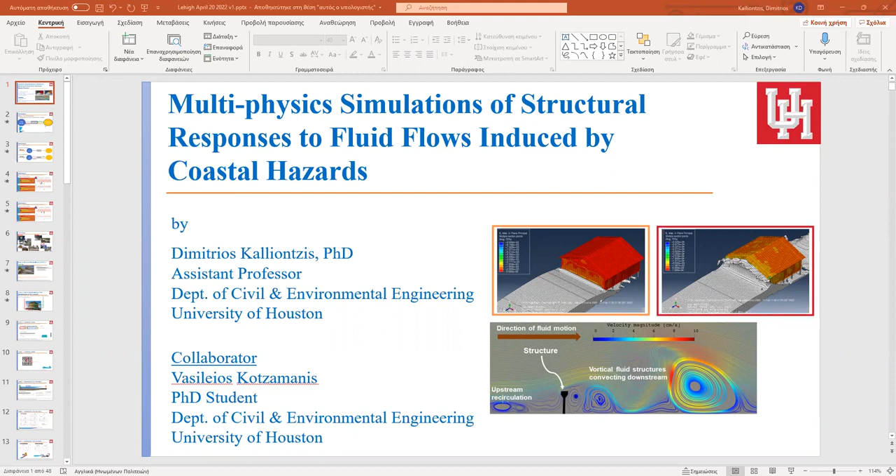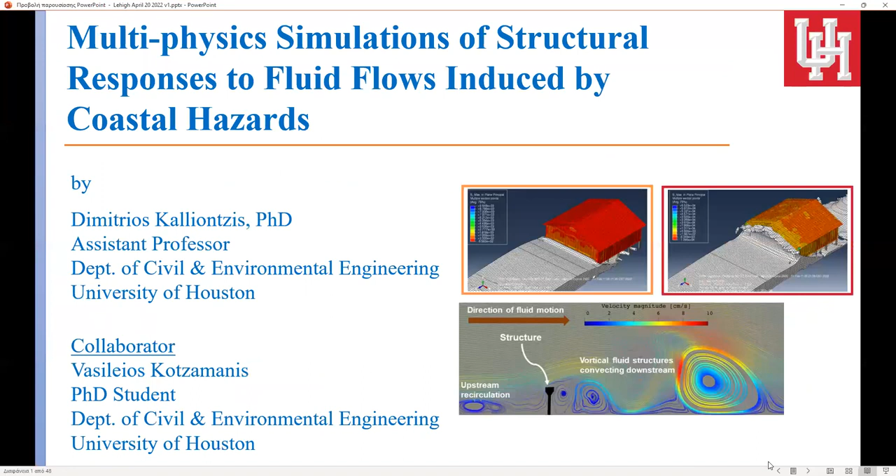So in the first— Dimitrios, sorry, yes. Can I interrupt you a minute? Because we only see the first slide, your title slide. Are you still on that title slide? Oh really? No, no, I'm sorry to interrupt. Maybe if you go into presentation mode, that may work better. Yeah, thank you, sorry for interrupting. Oh okay, I thought— sorry, I'd give it a little bit. Yeah, I just didn't know to make sure. Okay thanks, yeah, thanks Jim, I didn't pick up on that. I thought the presentation was moving forward because to me it was, but how about now? Is it better? You're good now. Okay, background slide is now, and then. Okay, great, yeah, I was going through that. I thought that that was on.

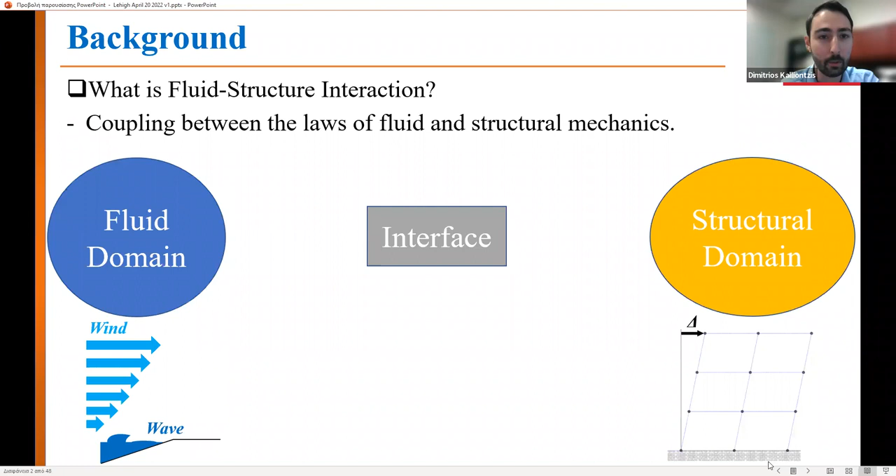So basically, let me go through a little bit back to my discussion so that everyone follows what I'm talking about. I try to go through a definition of fluid structure interaction. In fluid structure interaction, you have the fluid domain, and you have the interface between the structure and the fluid, and then you have the structural domain. Usually in a fluid structure interaction, you have the fluid forces transferred to the interface, and then from the interface back to the structure, and then you also have the structure deformations going back to the interface and affecting the behavior of the fluid domain.

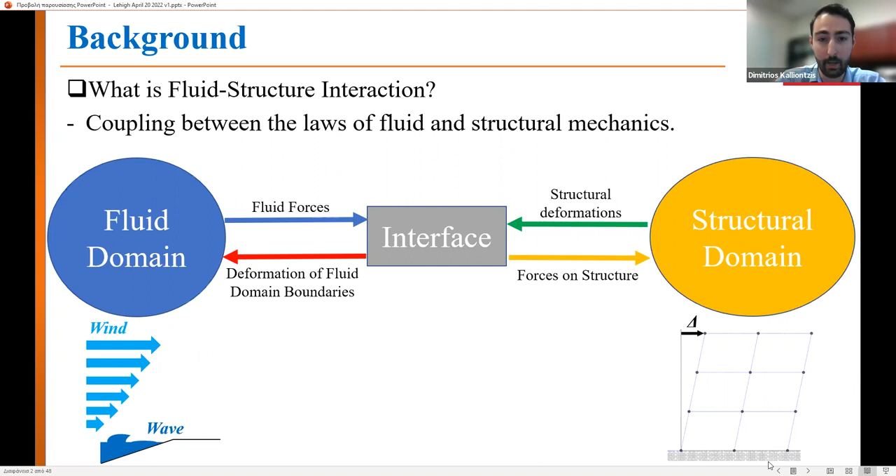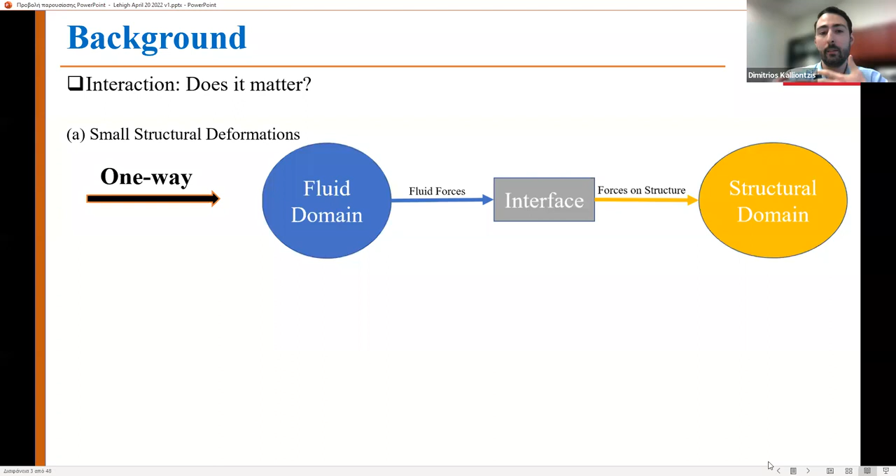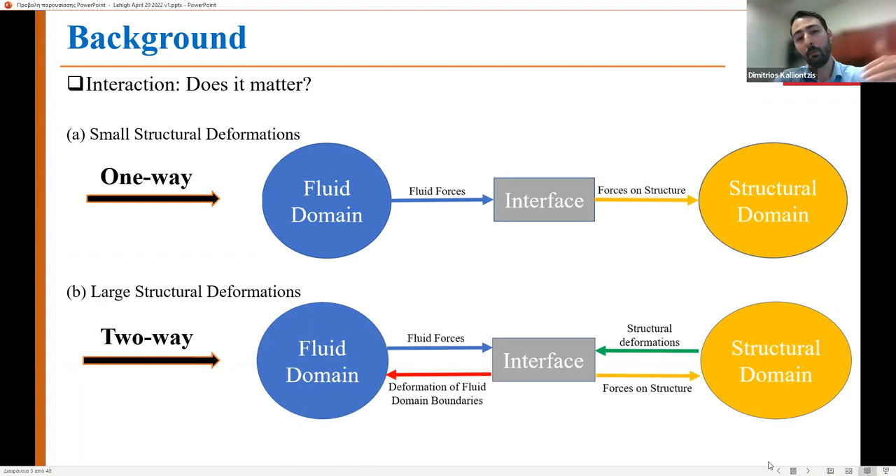So then what I talked about is, you can have two types of interactions. Either you have one-way interaction, usually the case where we have very small structural deformations that may not be affecting the behavior of the fluid domain. Then you have another type of interaction, two-way, where you have large structural deformations where you do need to transfer the knowledge generated from the structural behavior back to the fluid domain. So that kind of separates the two, one-way and two-way.

And here I show one example trying to address this question of why the interaction really matters, and should we actually transfer the information back to the fluid.

And then I have another example where I compare this very small deformations case to where we have large level structural deformations. In the first case, where you have the small displacements, the frequencies of the oscillations are different. In the large displacement case, the frequency of the oscillations is affected by this loop of information going from the fluid to the structure and back to the fluid.

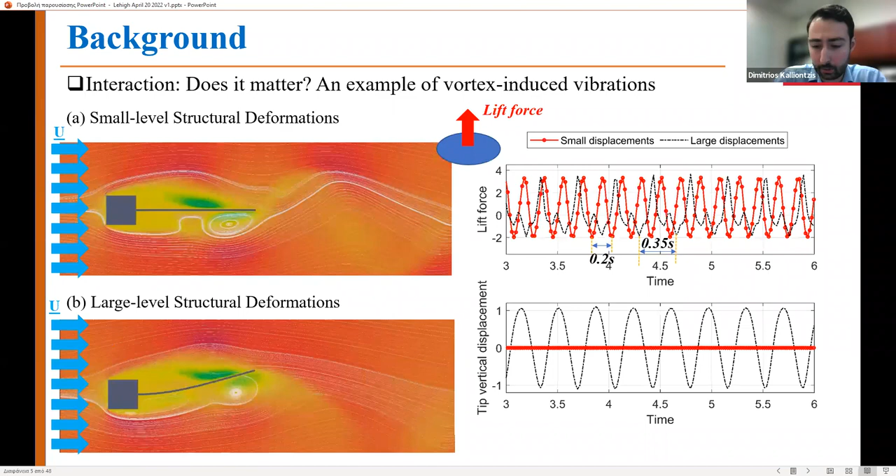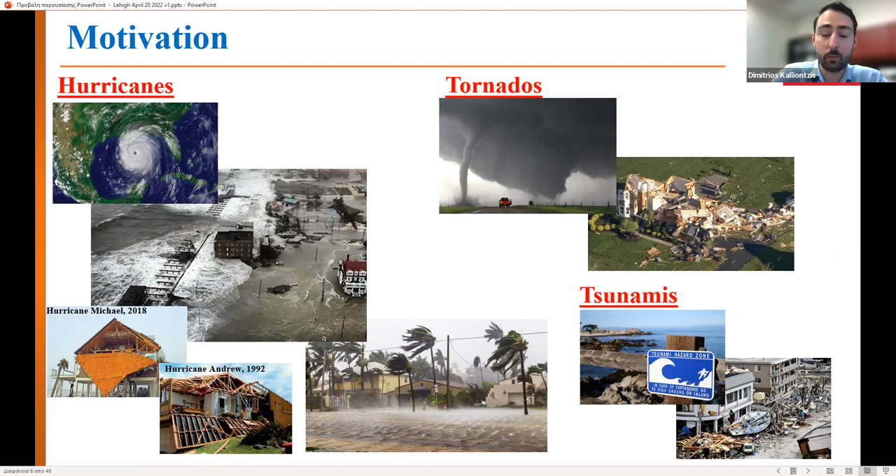So there are many cases in nature where we may need to pay attention to this two-way type of FSI behavior. And why do we care about this in civil infrastructure is because we have many types of problems related to fluid loads applied to structures, which can be due to wind or due to wave loading.

The first study that we tried to approach here at the University of Houston related to elevated coastal housing. Why elevated is because in many cases when you have a coastal house near the shoreline, you do have waves, you do have surge, and by elevating the house, you kind of reduce or even completely avoid the wave loading to the housing.

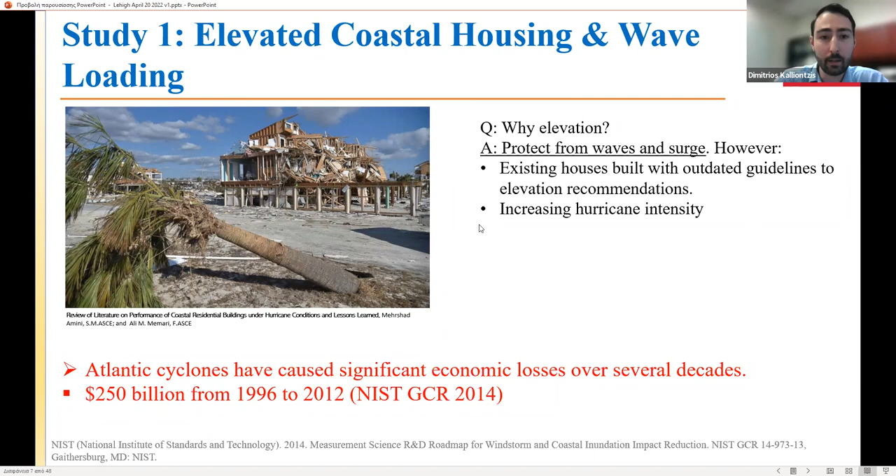However, there is a motivation still about looking into the wave loading affecting the houses, mainly because some of those houses were built with outdated guidelines related to elevation, and also there is the issue of increasing hurricane intensity, that maybe in the future we will have to encounter larger waves.

So in this type of problem, we try to look into two sources of flexibility for the structural system. One relates to the effect of the timber-to-timber connection for light frame elevated coastal houses. And then we also looked at the SSI, or the effect of the foundation flexibility.

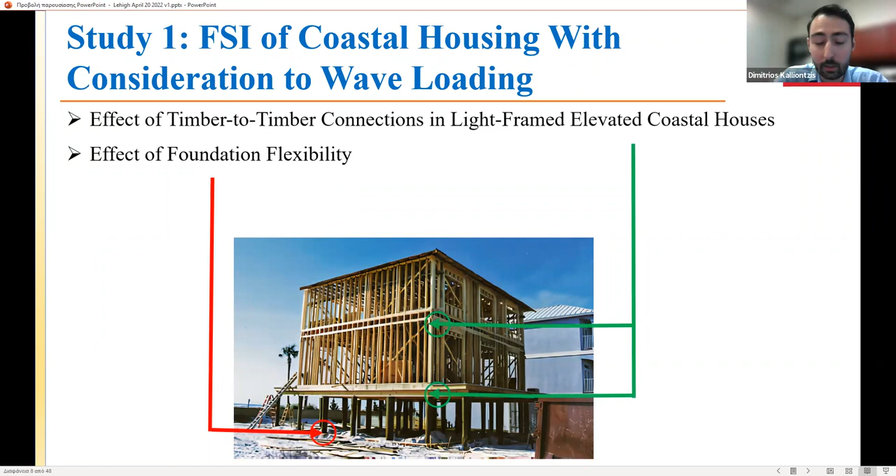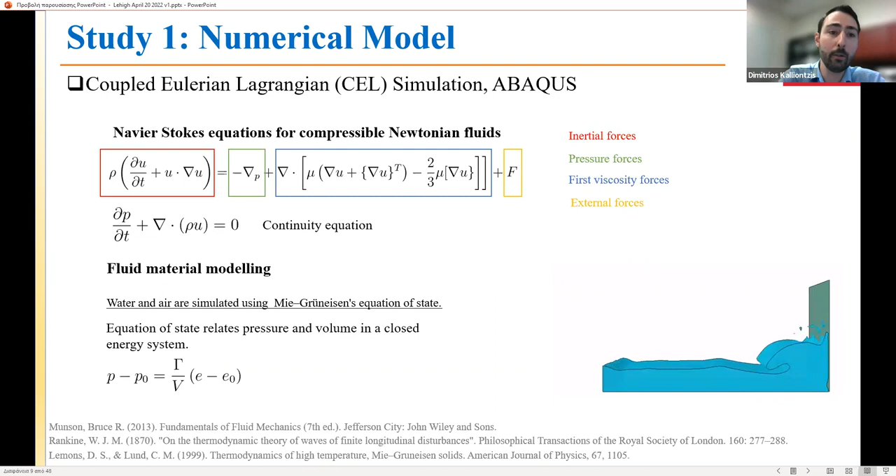So for this study, we tried to use an existing framework for simulation. It's in Abaqus, called a coupled Eulerian-Lagrangian simulation. In fact, this is what is called an immersed boundary method that is being used in Abaqus.

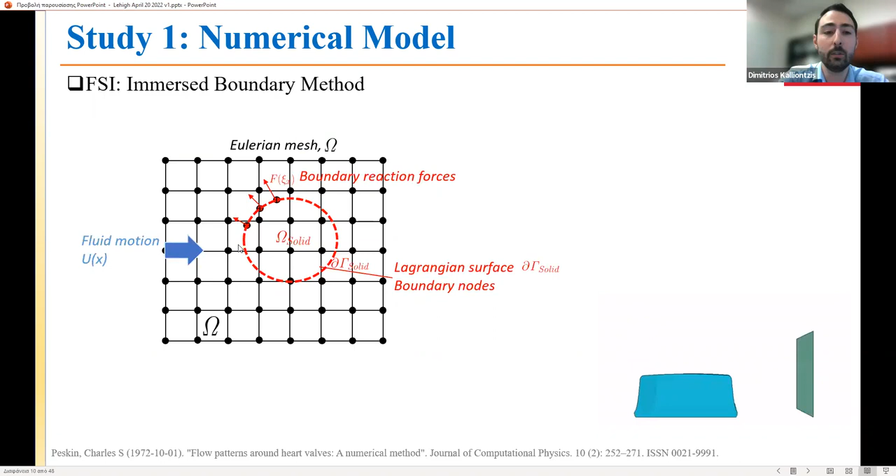The nice thing about this method is that you build your Eulerian mesh and then you immerse the structure into this domain. It's also named in the literature as what is called an interface capturing approach, where you only have to use some kind of interpolation function to establish the interface between the structure and the fluid.

So before we embarked on actually solving the problem that we're after, we tried to use some of the existing data to compare with the capabilities of this method in Abaqus, and how well it can capture experimental data. So we looked at a problem that was solved.

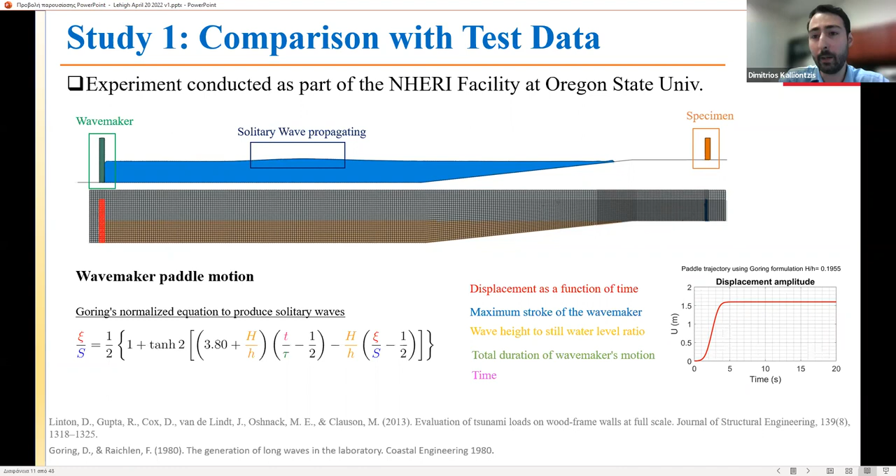I think it was an experiment at Oregon State, where there was a wave maker producing a solitary wave, and there was a relatively rigid specimen on the other end that would experience the wave and measure the pressures on the specimen.

So in the first comparison, we compared the wave profiles generated in Abaqus and in the experimental setup. Overall, I think the wave profile was captured pretty well. There was only one case where we were not able to capture the wave, just before the crashing of the wave, and this could have been because of some nonlinearity at the discontinuity of the surface of the coast, and this is an issue we're still investigating.

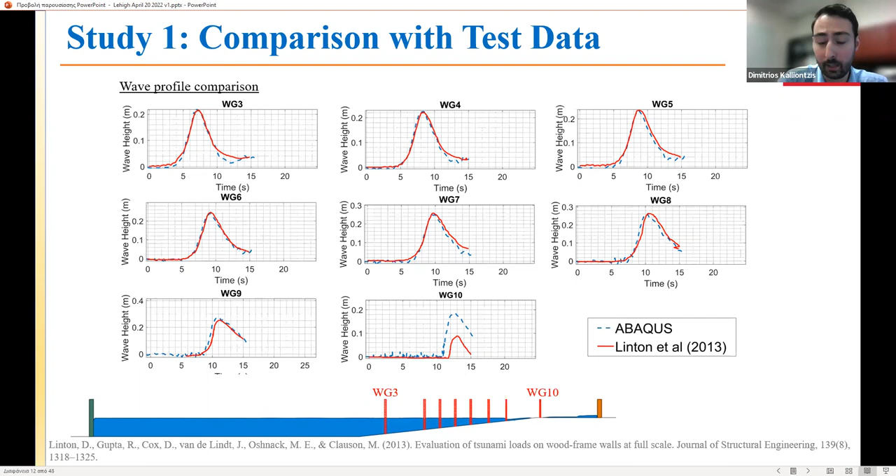But there was also some numerical analysis before trying to capture this wave profile, the crashing, and they were not able to either. It was kind of similar results to ours.

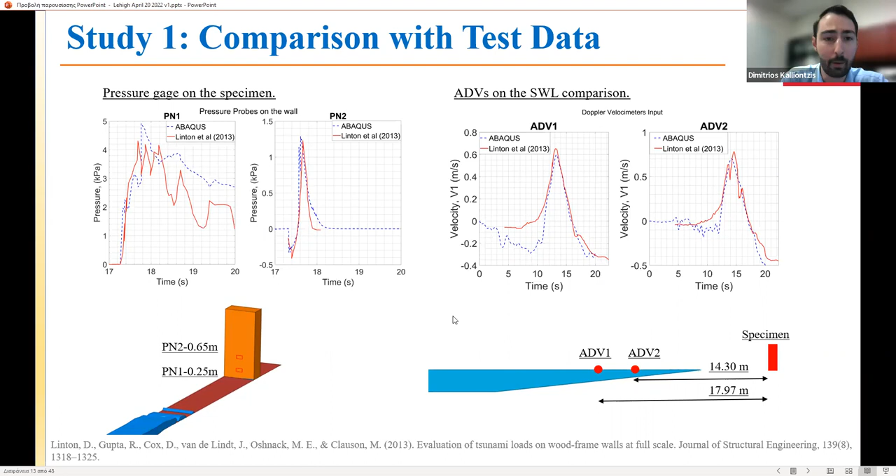So here is some comparison also on the pressure gauges that were on the specimen. This kind of more localized comparisons, and then some comparisons on the velocity meters that were also installed at different locations. Overall, I think the comparisons were pretty fair for our application.

So we moved forward with modeling of a coastal house that was developed based on FEMA P499.

There were some recommendations for the construction. It was an elevated house, light-framed, with piles embedded into the soil about 10 times the diameter of the pile.

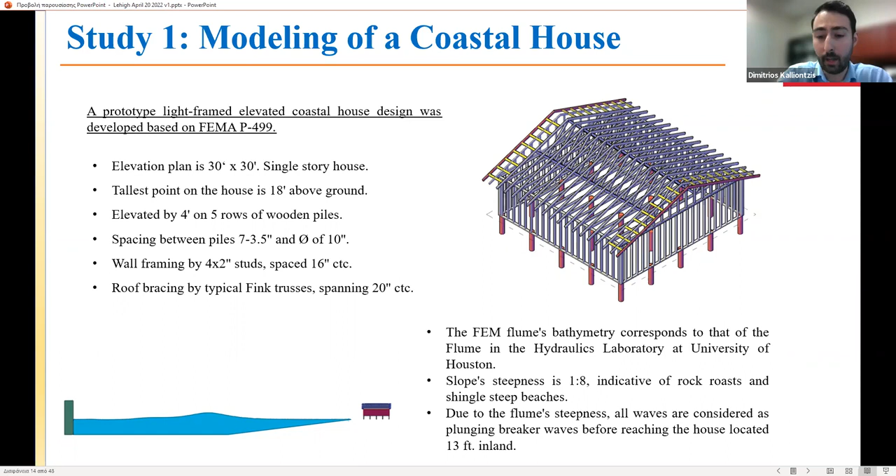This shows some details of the finite element model. It's based on shell elements for the front facade, which also included the timber studs as stringers—an approach currently used in Abaqus. We also modeled the pile foundation with PY springs.

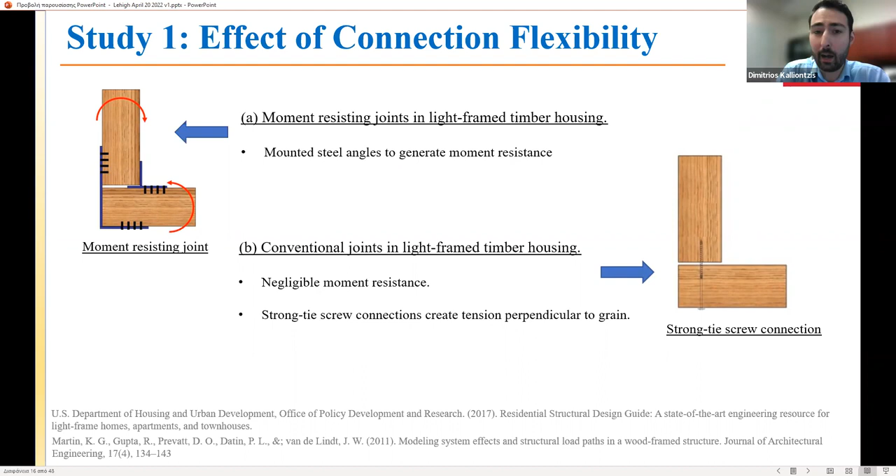Some parameters we varied in our analysis included the effect of connection flexibility. One type is a moment-resisting connection, and another is more typical for this type of house, basically just providing a pin support.

We also did analysis without considering soil deformation, where the piles were constrained at the level of the soil. Then we ran the analysis considering the flexibility of the soil using PY springs.

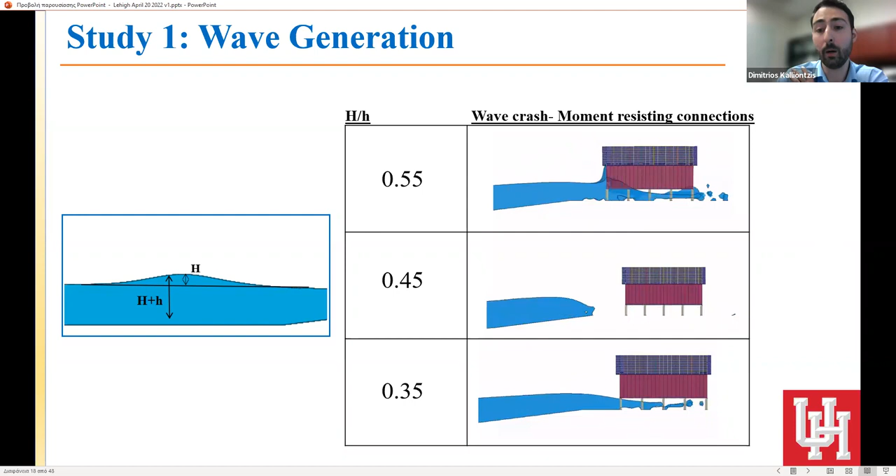This is a demonstration of three types of waves with different heights. In the top case, a higher wave caused a higher surge on the house, then a medium level surge, and then a smaller surge. In the third case, the wave was barely touching the house, but there was still some surge and force developed on the facade.

Based on that, we identified three phases in the interaction between the house and the wave. The first is when the wave touches the house. The second is when the surge takes place and ends, where the velocity at the peak of the surge is zero. Then splashing back starts as the third phase.

Then we compared the three cases of waves. As expected, as you increase the height of the wave, the forces on the facade are certainly going to be higher.

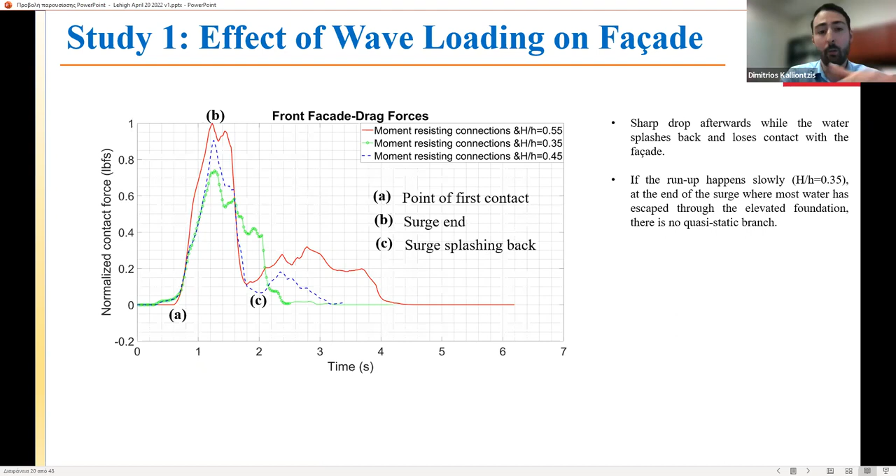In the two worst wave scenarios, you see a peak happening, then a drop, but then another increase in the force applied to the facade. This is because when splashing back occurs, the trailing edge of the wave comes in and creates a second peak, which is not present in the lowest wave case. There's no quasi-static phase here because after the wave crashes and splashing back takes place, the water either withdraws back or moves under the base of the structure.

One interesting result from this analysis was that the flexibility of the structure does matter in the magnitude of the applied force. This is just a linear elastic analysis in terms of material, so as a next step we need to move to nonlinear material behavior for the house. But even without that, you see that as the flexibility of the house increases, there is a significant increase in the force.

Why is that? As the facade deflects, it allows more water to concentrate in front of the house. As the trailing edge approaches and more water concentrates, that causes this increase in force. This is demonstrated with the two types of connection—moment-resisting and pin. Essentially, the front facade acts like a curved sea wall that retains the increased wave volume, which increases the force.

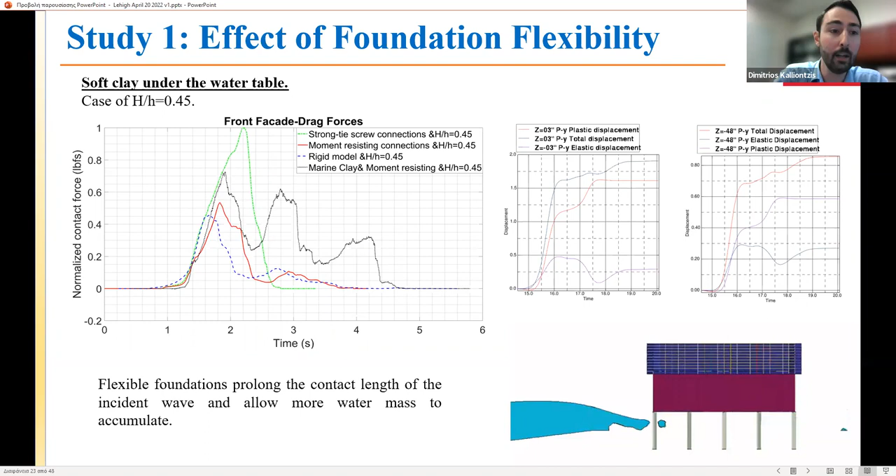You also see fluctuation in the force being applied on the facade, and this is basically what I would call a semi-sloshing phenomenon, because you allow more water to come in, and then it recirculates locally in front of the facade, causing this variation in force.

So some conclusions from this first study were that in the design of this type of house, and in many structures, we may need to reconsider the flexibility that comes either from the connections or from the soil behavior, as it can certainly play a role in the interaction of waves with coastal housing.

Of course, in all three cases, regardless of whether it was a small wave or larger wave, coastal housing may experience significant forces if the waves are allowed to surge on them. And this is certainly why FEMA suggests this elevation.

But still, even with that, some of the existing houses are still going to experience some kind of wave loading because their elevation was not calculated based on the most updated recommendations, and also there is a danger of increasing hurricane intensity.

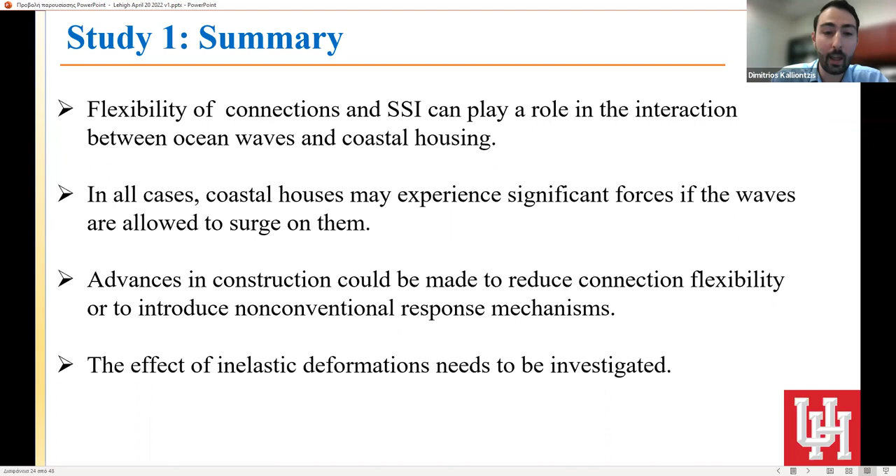So we may certainly consider new construction methods for this type of housing, or also try to think about non-conventional response mechanisms, as we have certainly done for many years in seismic design.

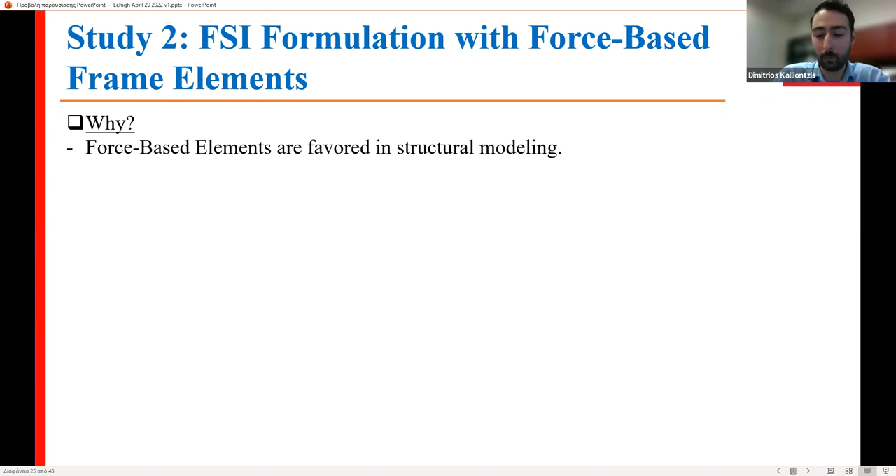So in the second study, we also tried to approach this behavior, this type of fluid-structure interaction phenomenon, in a different way. Yes, 3D analysis, 3D elements such as what Abaqus offers, are great, but in structural engineering we are very well familiar with and really like using force-based elements.

Right, so why is that? It's because we can certainly model large structures with lower computational cost and still get very accurate results.

Of course, force-based elements are well used in the Lehigh simulation facility, and they're very well known. They're also very well established in OpenSees and other types of software.

This is a classical force-based element that was developed in 1991 by Taucer, and then Spacone also established that in a journal paper. From then on, there have been many improvements.

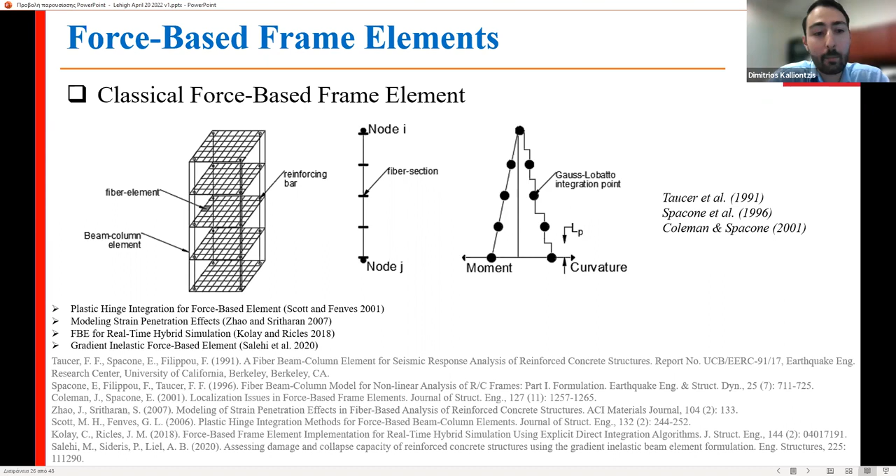There have been cases where plastic hinge integration was introduced, strain penetration effects. There's also another force-based element developed a little more recently at Lehigh to enable real-time hybrid simulations. There are also other methods being developed.

From our side, I also did some work back when I was a postdoc at UCSD. We developed a force-based element to incorporate axial load, flexure, and shear interaction that doesn't currently exist in many of these elements. Again, the beauty of this is that you can model any type of structural member with just a single element, so you can think about how important that is for computational cost.

So what is the concern of using force-based elements in FSI simulation? First of all, they are one-dimensional elements, so essentially they do not explicitly represent the physical structural geometry in the computational domain. So you have a tapered section, right? How are you going to capture this in a fluid-structure interaction?

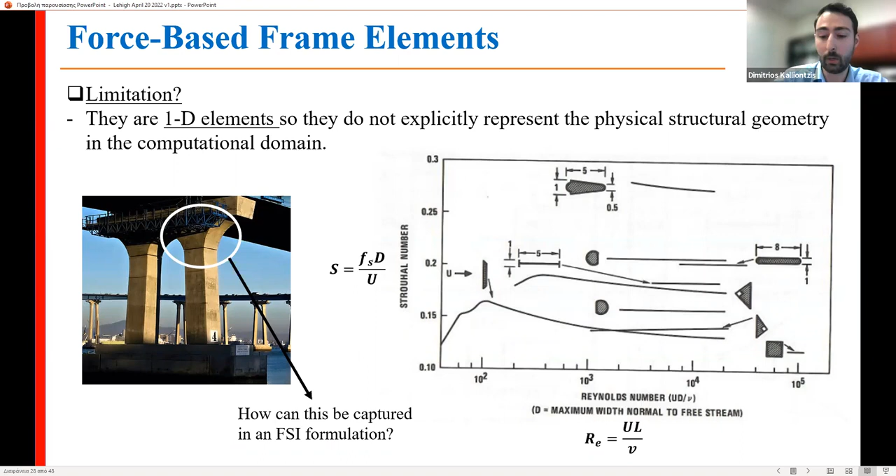And why is this important? It's because the shape of the structure does matter in the interaction. This is old knowledge for the CFD folks that have been studying this for a long time, experimentally, computationally, and analytically, where we know that the shape of the structure does matter. So how are you going to capture this in a fluid-structure interaction domain?

So this is what triggered me to think a little bit differently and see how we can do that. Based on that, I developed an in-house code for fluid-structure interaction with the goal to incorporate force-based elements. The idea is very similar to existing problems, and the loop that I described at the beginning of this presentation is still valid.

Now the difference is that the fluid domain interacts with an interface that represents the physical geometry of the structure and essentially consists of a computational void. The interface motion is essentially controlled by the force-based element, which is considered as a skeleton of this void that represents the structure.

So you have the fluid forces transferred to the interface, then those fluid forces transfer into what are called interface forces, and the interface forces are transferred to the nodes inside the force-based element. The force-based element, through beam theory, controls how the interface deforms, and then those deformations are transferred back to the fluid. So this is how I tried to approach this problem and incorporate force-based elements in the FSI framework.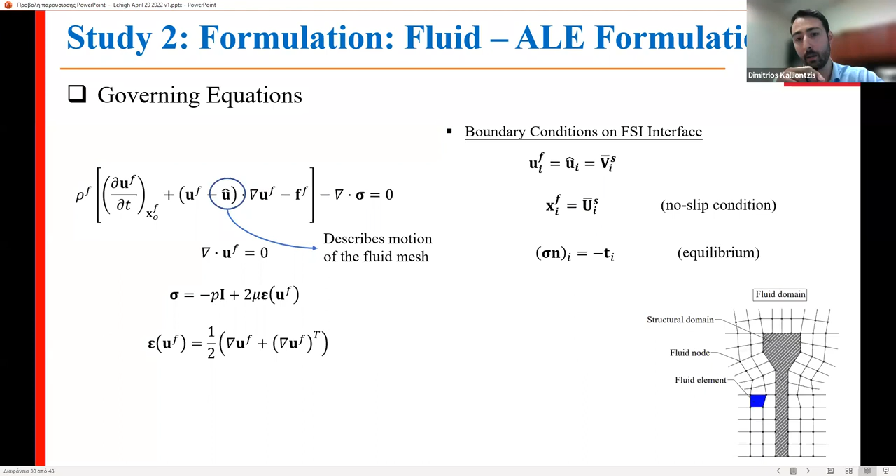In this ALE method, instead of immersing the structure into the domain, the interface between the structure and the fluid is very well defined, and the motion follows the movement of the structure. So there are boundary conditions similar to a non-slip condition at the interface, meaning the fluid particles cannot slip on the structure at the FSI interface, and you have force equilibrium on the interface.

To demonstrate how this method works: instead of having a constant mesh, as in the immersed boundary method used in Abaqus, the mesh is moving by following the forces and the movement of the structure. The interface is behaving as if following the motion dictated by the force-based element, and this happens through beam theory.

So the governing equations for the force-based element: in this case I just use a linear elastic element, which is existing theory for that part. The force interpolation function is used in this element, and I also use the consistent formulation for the mass matrix.

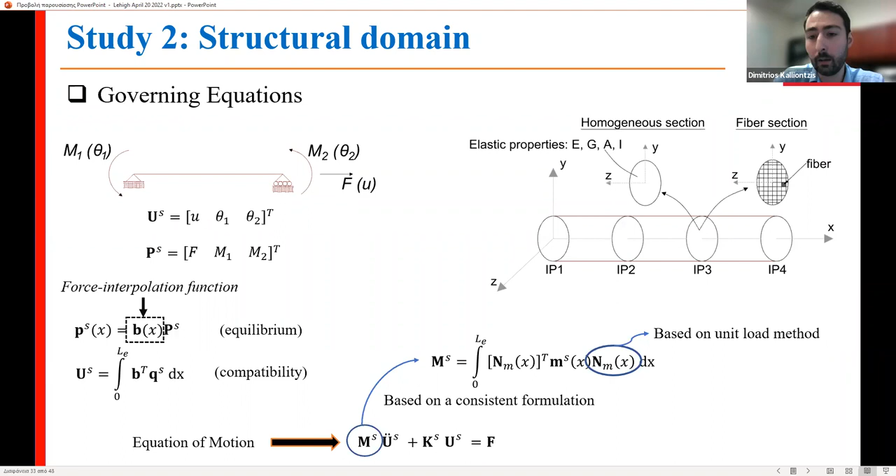As you know, force-based elements are based on a force interpolation function, so you have to use a method to come up with the displacement shape functions. This is done through a unit load method that I used.

However, if you try to apply that in a strong sense in a formulation like this, you may end up with significant instability. So what I did is apply that within a specified tolerance, where the stresses are essentially accounted as an unknown parameter, and then you solve for it.

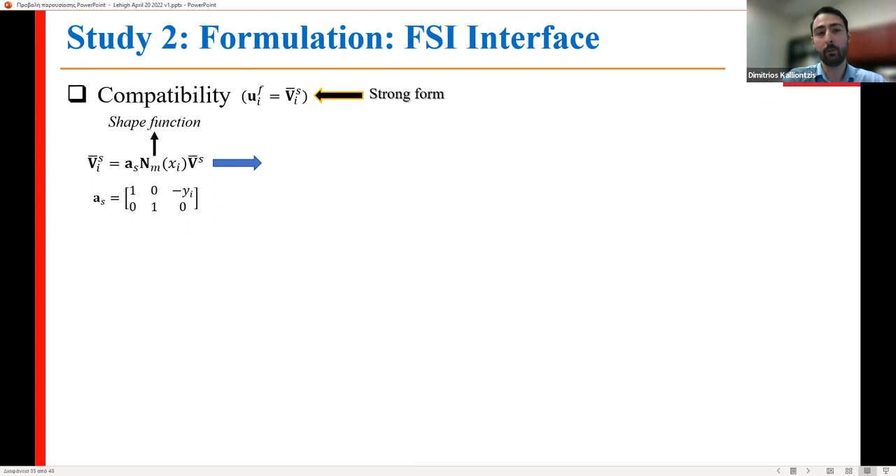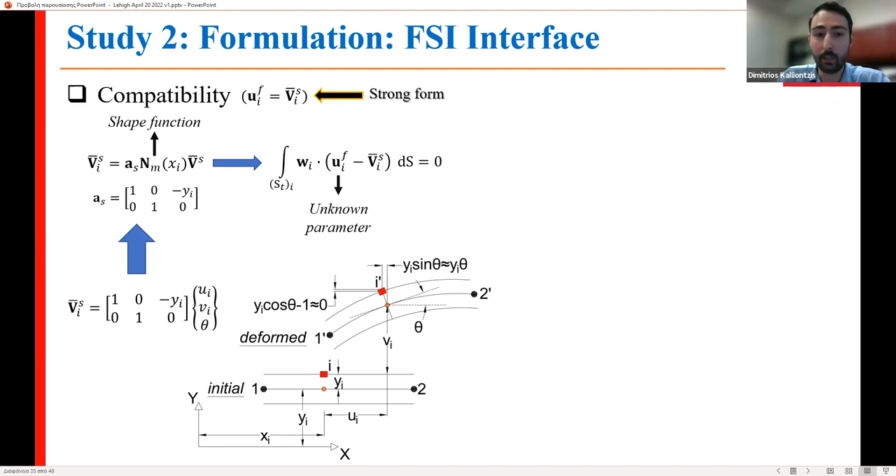And the compatibility is similar: the no-slip condition dictates that the velocity of the structure at the interface equals the fluid particle velocity at the interface. This is based on beam theory, approached in a weak sense, so the fluid velocity is treated as an unknown parameter in order to avoid instabilities, especially with added mass effects, which is a significant instability source for FSI problems.

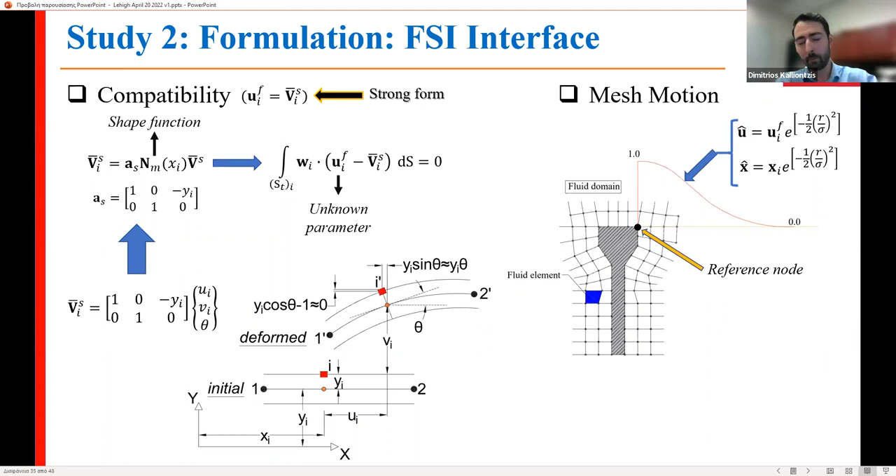For small deformations, the mesh motion can be done in many different ways. For small displacements, you can basically use a very simple Gaussian distribution, where the fluid elements very close to the structural interface move almost rigidly, and as you move away from the interface, the motion of the fluid elements attenuates. This is what's called Arbitrary Lagrangian-Eulerian formulation, because you can control the mesh motion arbitrarily and it does not affect the fluid motion.

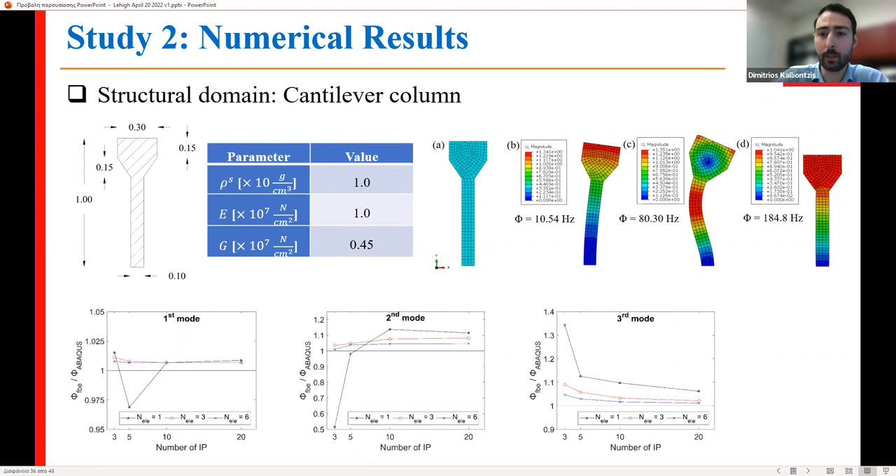So then, because this is a new code, I had to go through some kind of validation. I did some modal analysis and compared it to some results in Abaqus, just to verify that the analysis works as intended.

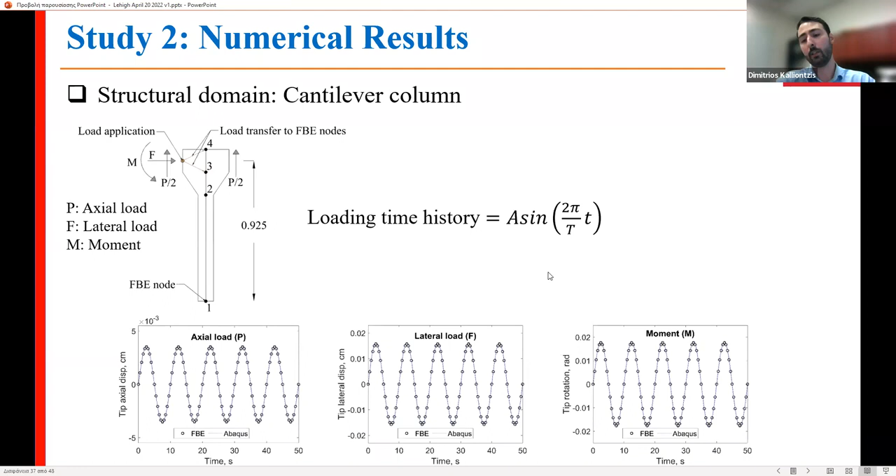I had three cases where I applied an axial load, an oscillating axial load, and a lateral load and moment at a point between the two nodes. I transferred that to the nodes, and then compared these results to the Abaqus analysis, just to verify that the way I applied it is correct.

I also did some verification studies for the fluid domain itself, with no interaction here. So first I verified the structure part and the fluid part separately, and then I'll show the fluid-structure interaction part. For this, I used a benchmark problem for the fluid with three cases of different Reynolds numbers defining the problem. The first two result in steady flow, and the third value of 200 results in unsteady flow.

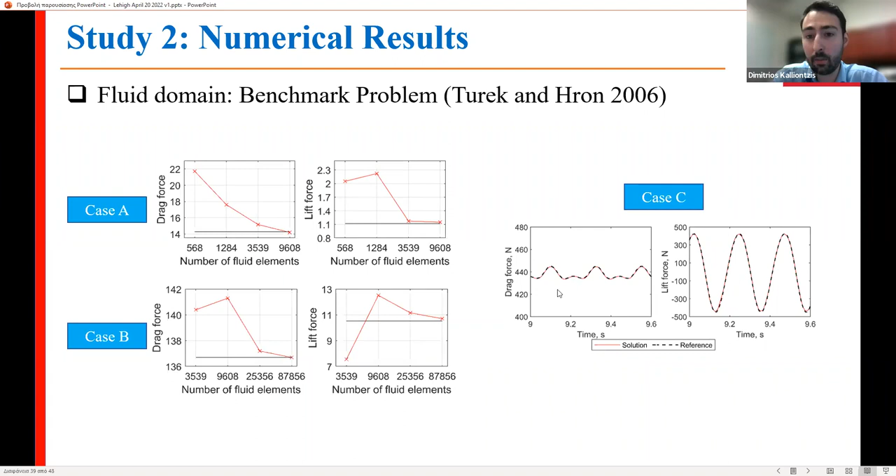So for this case, I compared the forces and did some mesh convergence analysis to see how well I can capture this. In the two cases, the force is just constant because it's a steady problem. In the third case, you see how the force varies since it's an unsteady problem.

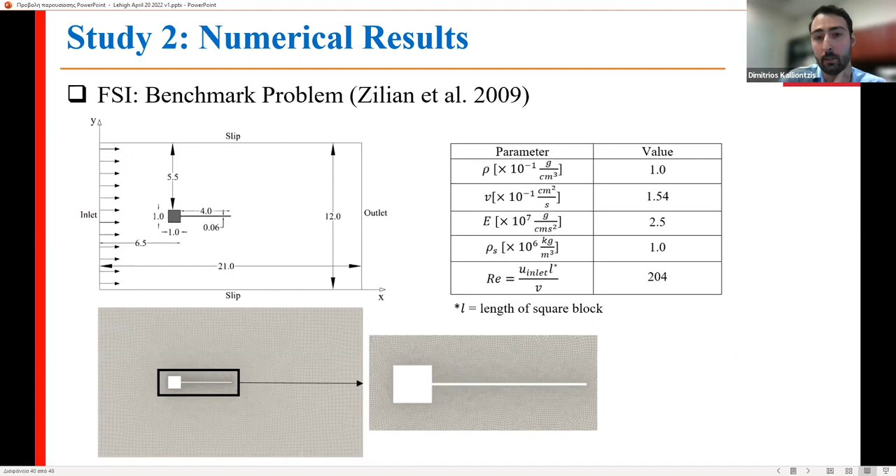Then I moved into another benchmark problem. This is an FSI, fluid structure interaction, for small displacements, so linear, geometrically near-linear displacements. This is the comparison between the reference result and the different analyses I ran with different numbers of elements.

One thing I noticed is that the result for this type of problem is relatively insignificantly affected by the number of elements. If you vary from 2 to 6 force-based elements, the result you get is pretty consistent with the reference, which actually verifies something we know well in structural engineering: that force-based elements are very powerful.

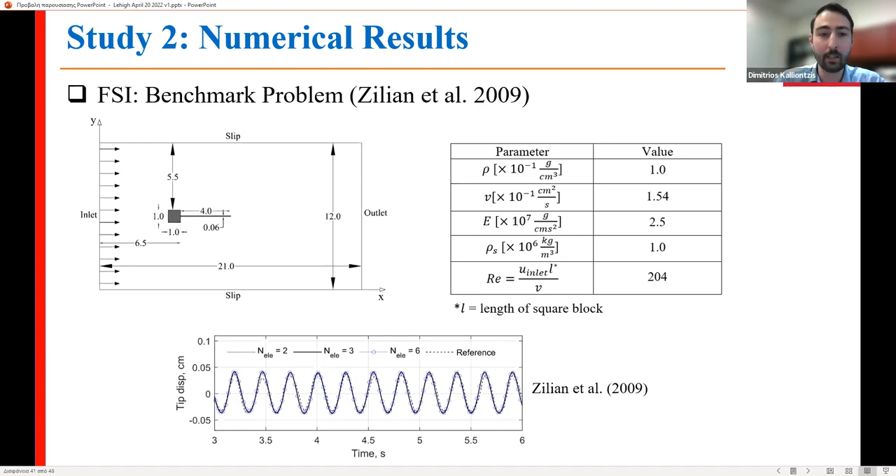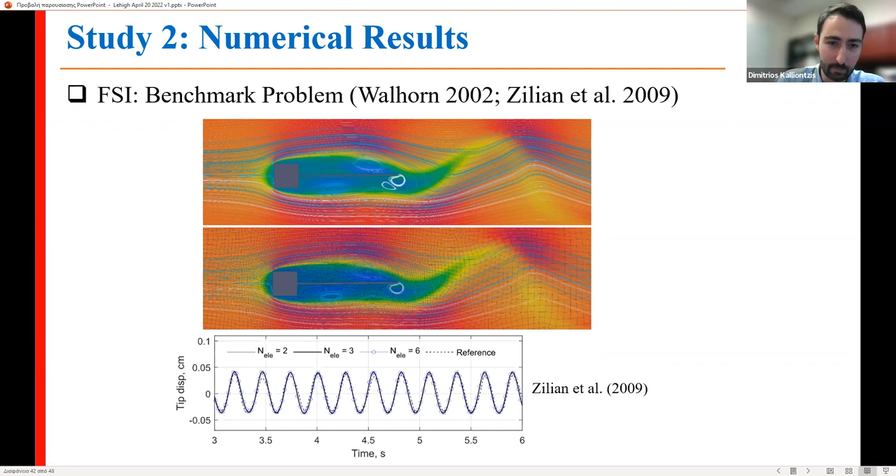And this is some comparison of this analysis with a video that I have. In one case, I show the mesh; in the other case, the mesh is hidden. But again, the mesh motion here was very small, so it was not significantly affecting the results. It was mainly controlled by this Gaussian distribution, a very simple case.

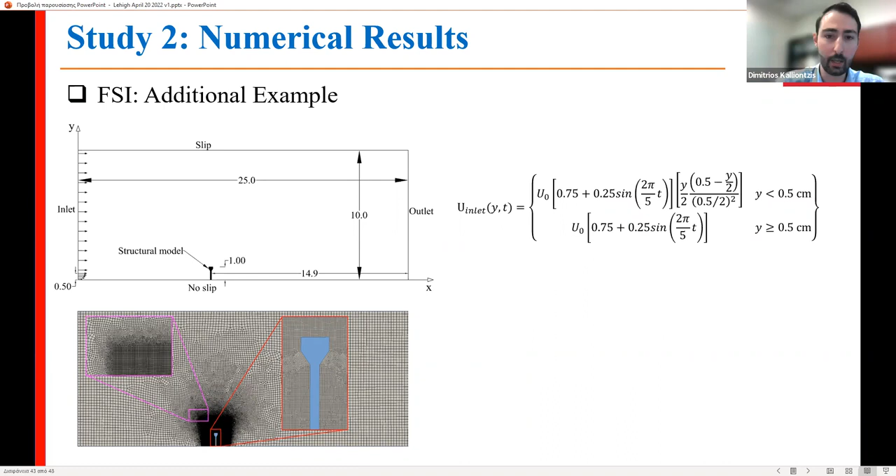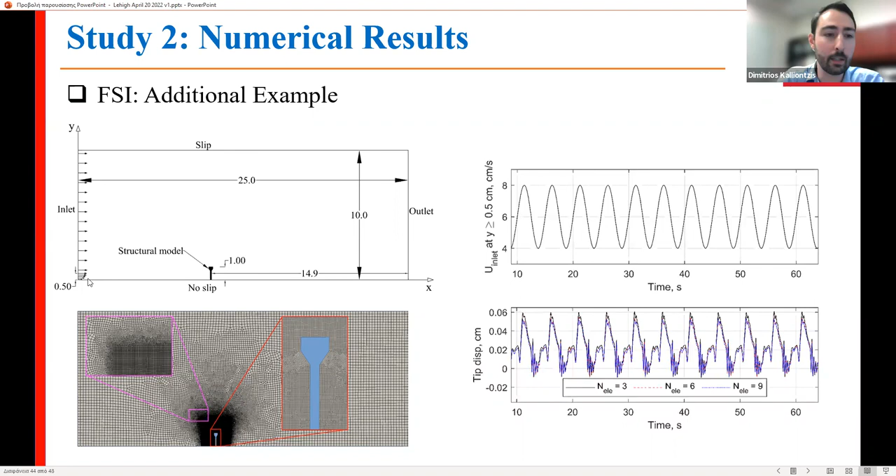Then I also tried a different type of analysis where I just have a vertical column. I did not have a benchmark problem to compare here, but I just tried to see how powerful the code is. Here you see an inlet velocity that is parabolic at the base, with no slip, kind of simulating a type of wind flow.

One challenge in this analysis was the significant wake generated by the column. You see those big vortex structures that develop, and this is always an issue in computational fluid dynamics—when you have a significant wake you have to make a long domain until the wake is dampened. But in this case, I tried to have a smaller domain and instead use what I call a backflow stabilization at the end.

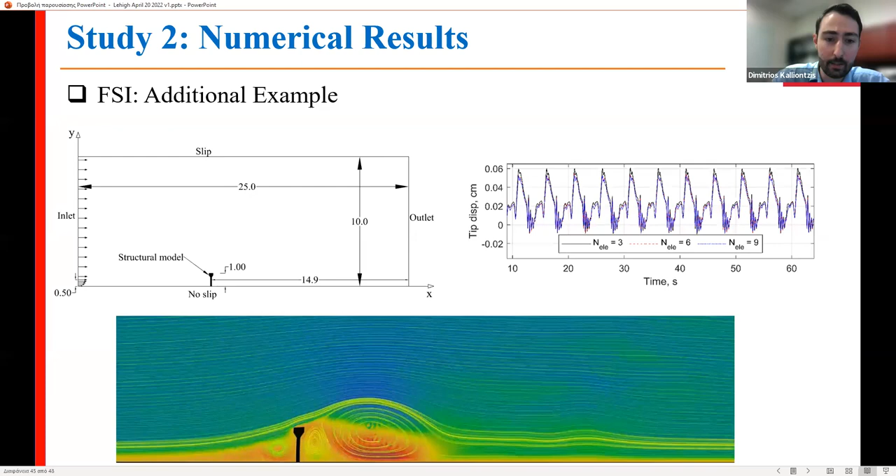One important part here is the mass balance: what gets into the domain also exits the domain. But if you have these big wakes, that creates a negative velocity, an inlet velocity at the outlet, that can lead to significant instability. So I used the backflow stabilization to enable this problem with as small a domain as possible.

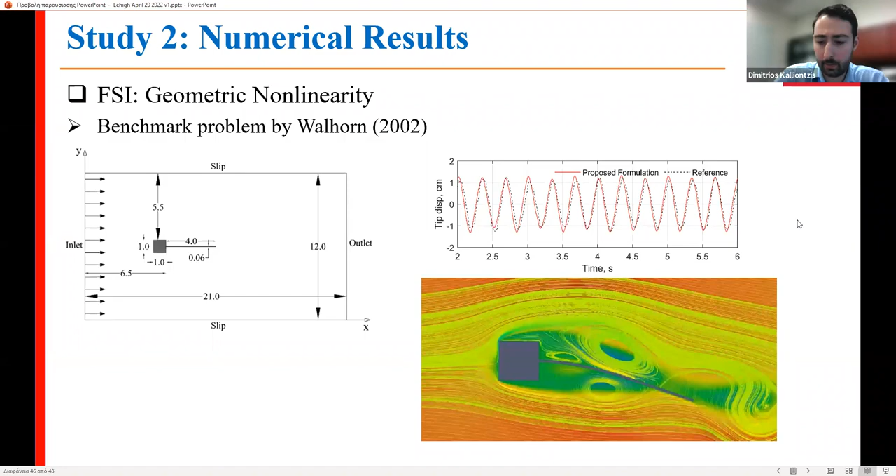So just a summary for this study. Of course, we're not yet at the point of studying effects such as waves or wind loads in a turbulent sense, but this is where we're heading with this code.

The first important step was to establish a code that can incorporate force-based elements and FSI calculations, have a correct representation of the geometry of the structure in the FSI domain, and then make sure we verify with some benchmark problem to ensure our code works as intended.

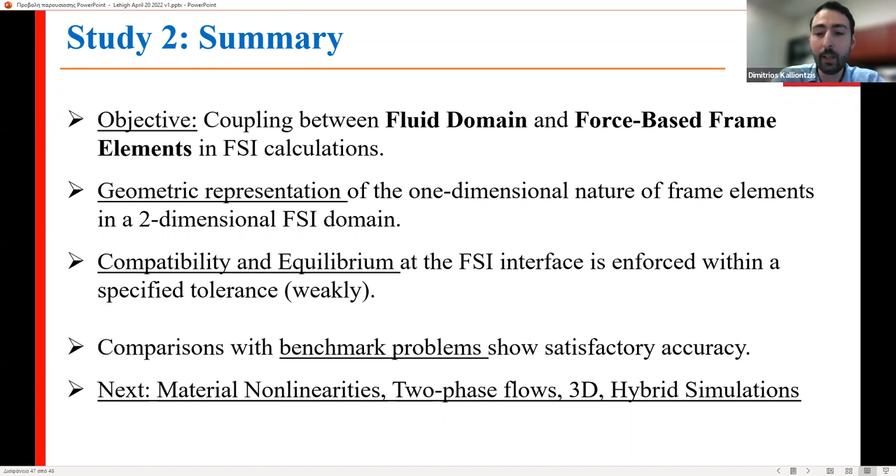The next step is to move towards material nonlinearities, two-phase flows, three-dimensional analysis, and then eventually, hopefully, we can use that for hybrid simulations. Of course, there is a long road until that can happen.

And then this is some of the related publications. We're also presenting some of this work on EMI, and publishing some general papers on that, but we're still working on some. With that, I would like to thank you very much for your time, and I welcome any questions or suggestions.

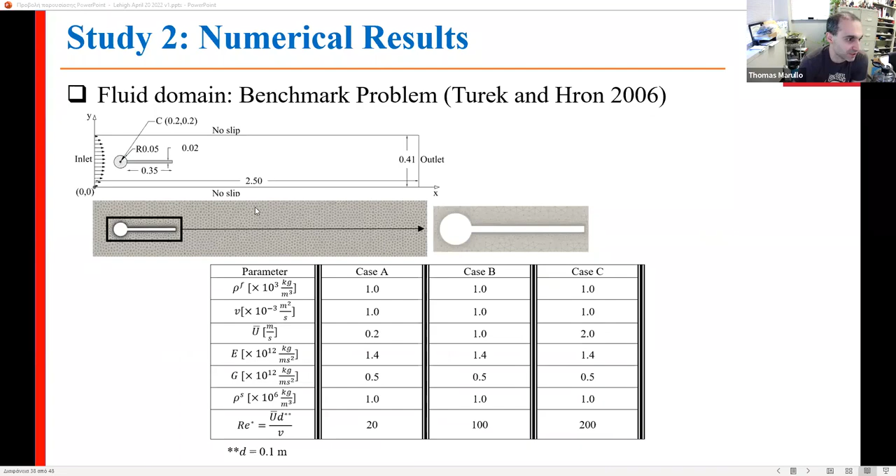Joaquin Morris asks, regarding the force and figure of slide 21 of 48: is this force the load applied by the fluid, i.e., water pressure integrated on the facade surface, or the structural load perceived by the structure obtained from the structural model? So let me pull up slide 21 and look at the question again.

From an equilibrium point of view, these two have to be the same. The load is, as I mentioned, this equilibrium condition at the interface. So it's not only the pressure, it's also the viscous effects that come in. But the way we calculate it, if that is what is asked, is through the contact force enabled in Abaqus. The structural load perceived by the structure is equal to the fluid forces on the interface by equilibrium. I hope that answers the question.

Well, if Joaquin wants to respond, go ahead please. Let me see if I got another Q&A. Nothing yet. Dimitrios, I had a question, I had my hand raised so I can wait for Tommy to get to the others. Oh, I'm looking at the wrong one. I'm going to lower your hand, but no, you can go ahead.

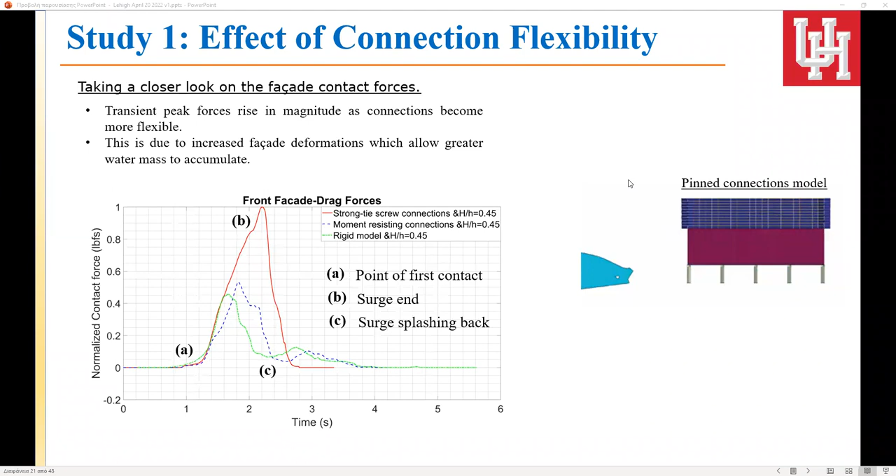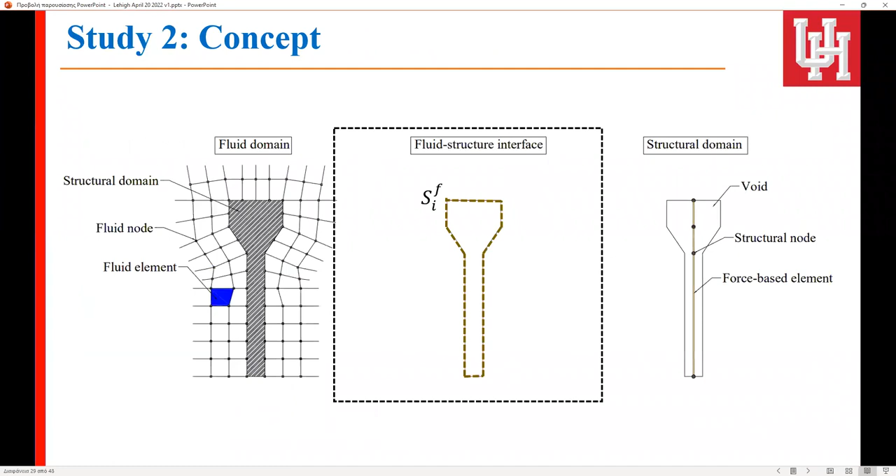What I wanted to ask about is in the fluid loading, how were you representing that fluid loading on the element itself? I saw a point in the middle of an element, but the fluid itself is distributed type loading, so was it represented as such? I think then, if that's the case, for force-based elements as you show, you can get by with much fewer elements than if you use other formulations like displacement-based. So that point FSI is just an illustration, but it's continuous along the element, and you're integrating the pressure over the length of the element to get the moments and shears at the end of the element, right? Yes.

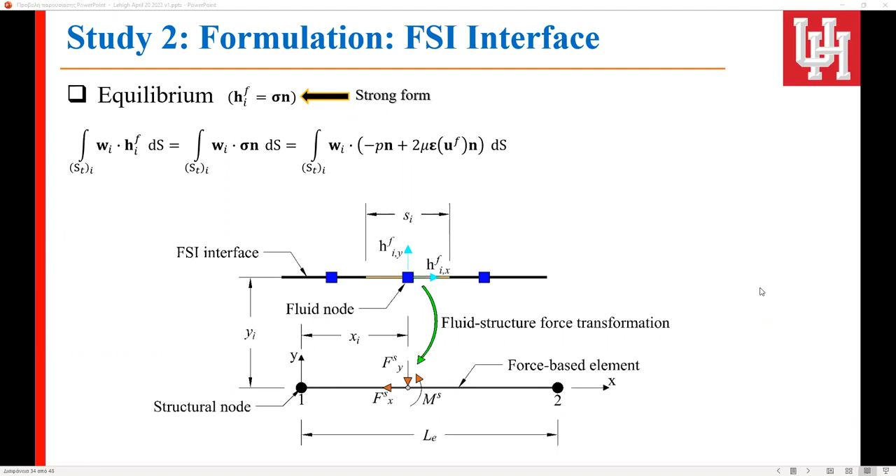Yes, that's a good question. This is what is called a non-matching mesh approach. You have approaches where you match the mesh. Even if you use displacement-based elements, it is very difficult to match the mesh in the fluid domain at the interface with that of the displacement-based element. It's still very difficult to do, and I'm not sure how. So what you have to do is mesh these independently, and this is also what is attractive about this approach. Here, you have the FSI interface, and the blue rectangles are essentially the fluid nodes on the interface. On this interface, you discretize with 1D elements for the 2D case, and then you estimate the forces produced at the single node, essentially a horizontal and a vertical. Then you have this lever arm that I call Y sub I, and that transfers that into loads on the interface, which is essentially axial, vertical or shear, and moment. The moment is basically produced by the lever arm. Then for these element nodes, you use equilibrium to transfer them into nodal loads. So you have to go through this transformation process to the element - these are element loads, but again we need nodal loads in the formulation, so then you use equilibrium to transfer them onto the nodes.

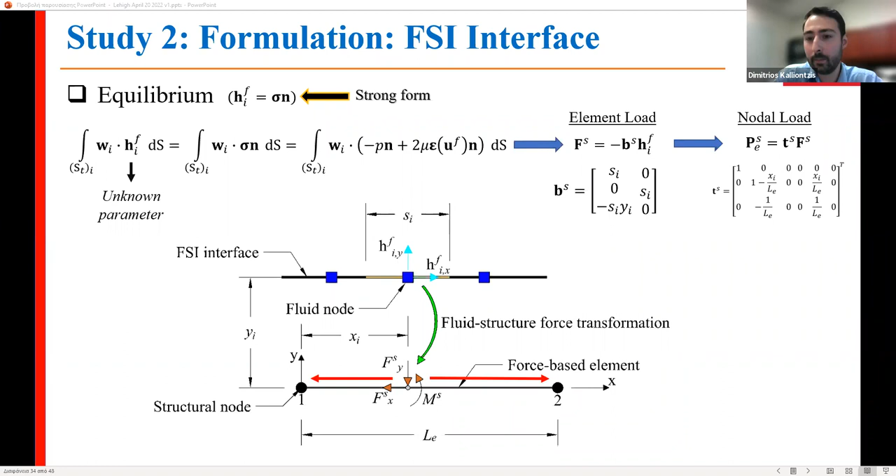Thank you, thank you for inviting me. We have another question—yeah, if you want to read it out loud instead of me reading it verbally, you could. Yeah, I can read it.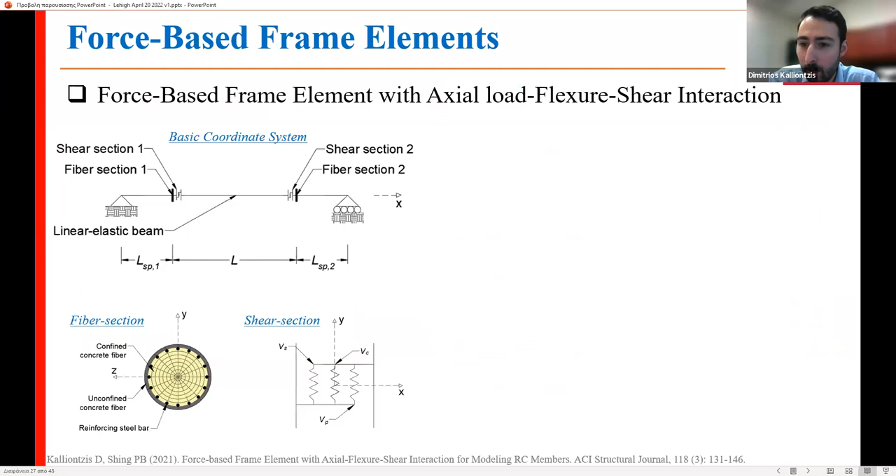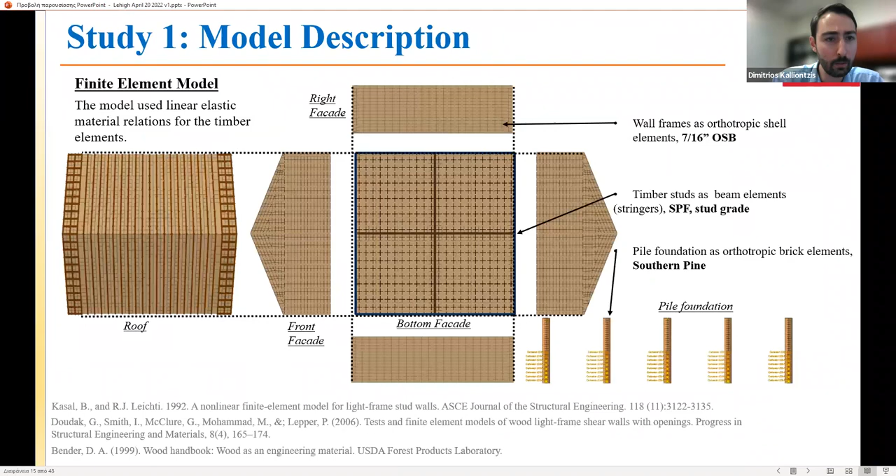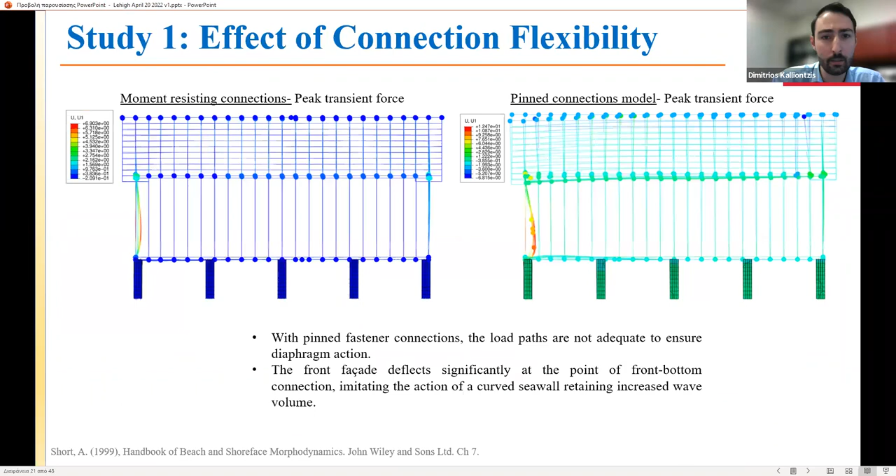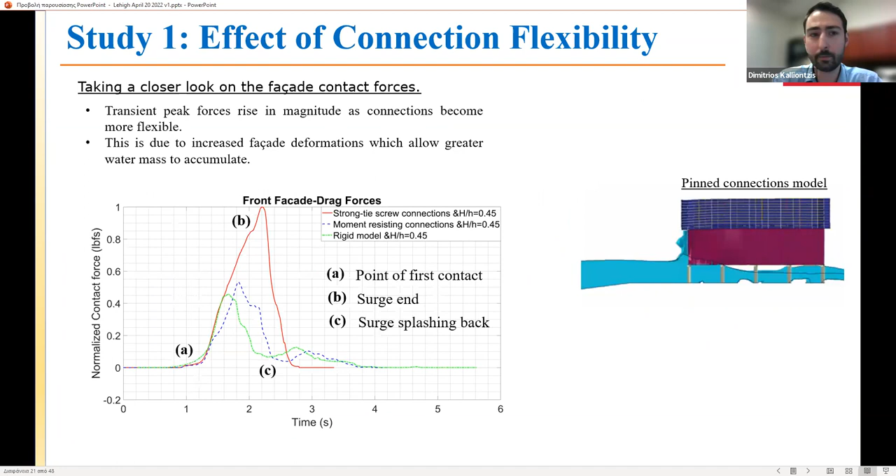What is the soil type that you use when you account for the flow? This is something we're also trying to look into, different types of soils. For this one, let me check—I think we use saturated clay, but let me see if I can find that. Yes, we use saturated clay, I believe, for this one. But we're still looking at different types of soil, this is not the end of it, we're going to try to look into it. Yeah, we looked at saturated clay.

And then, did you rely on actual fluid data to estimate? Yes, I believe that the data we got from this reference here is also based on experimental data that were used to derive the p-y curves.